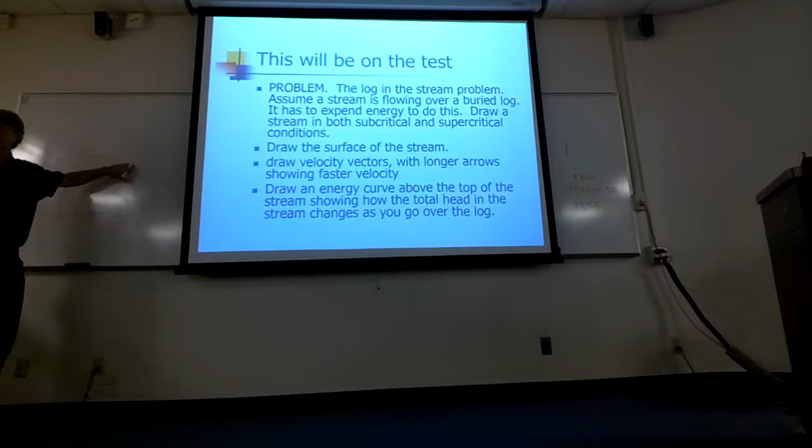I'm in supercritical flow. How do energy and stream respond? I'm in subcritical flow, and my stream goes over a big step. How do stream energy and water depth respond? Just think of simple scenarios and how subcritical flow responds compared to supercritical flow.

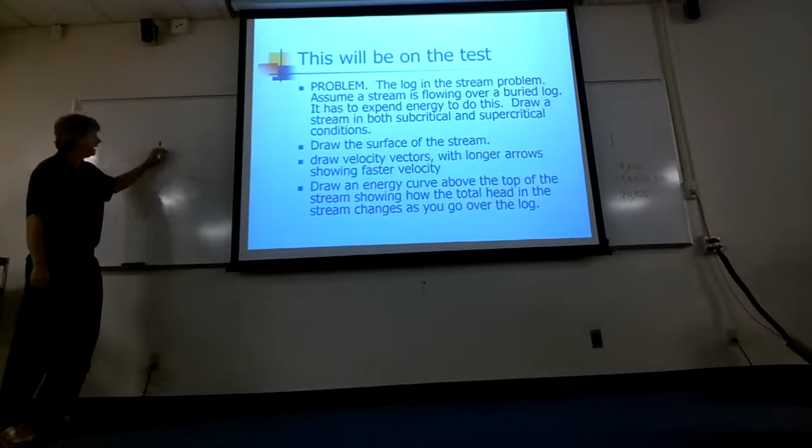So for example, here you'd be gaining energy, because you're going off a cliff. You're trading potential energy for kinetic energy. The stream would actually gain energy, and the height above the bottom of the energy dashed line would get greater coming down here.

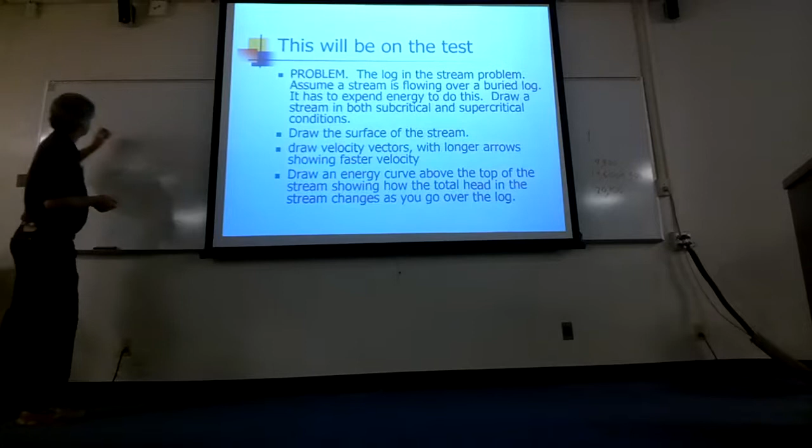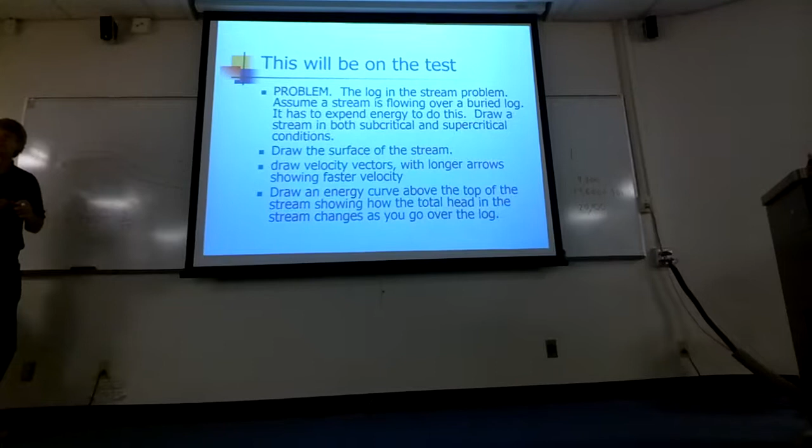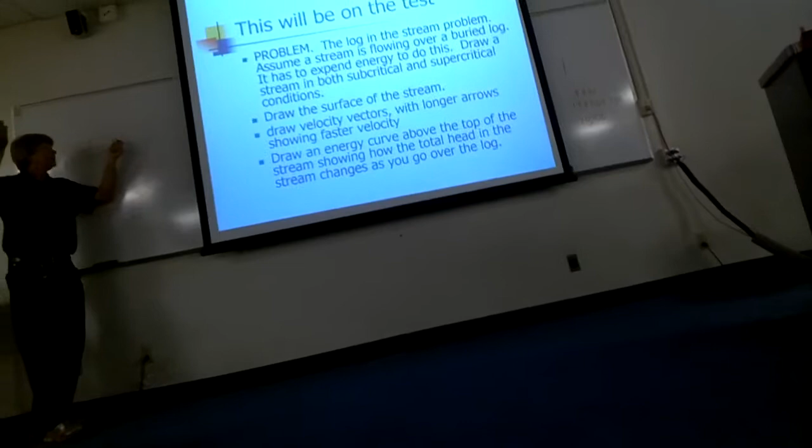It's like so you're going up? No, it wouldn't go up because water flows downhill, but it would get higher above the stream. This distance would get greater. It'll never go up, because you're adding energy by dropping elevation. So it'll never go up, but it can get higher above the bottom of the stream.

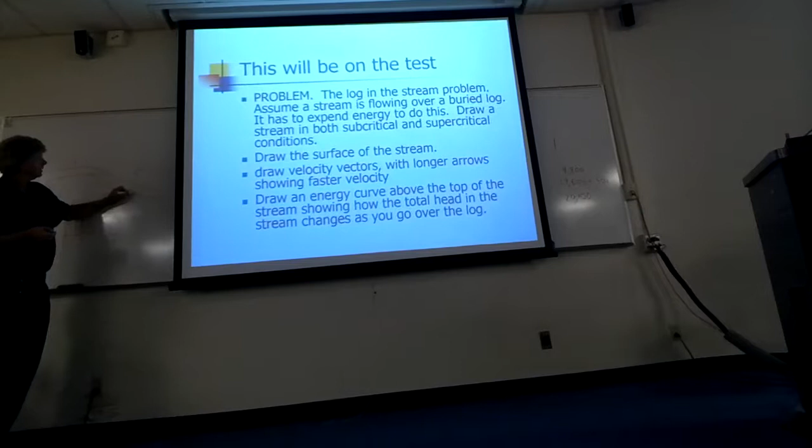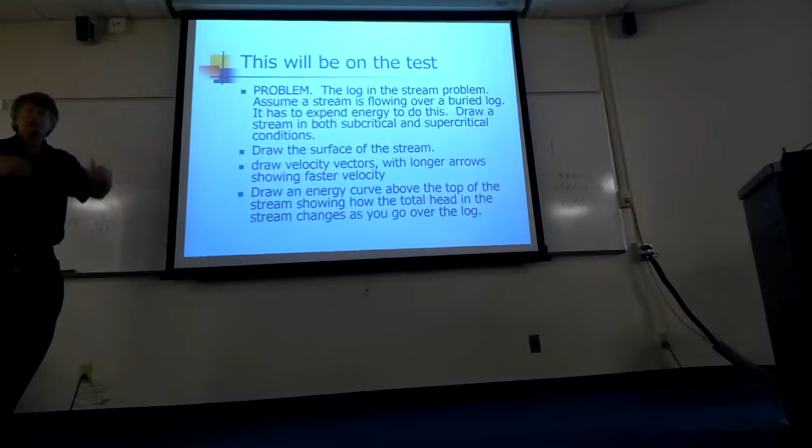That's actually why you get rapids in supercritical flow. You're going down a steep hill, so the water accelerates enough that it becomes supercritical. Why don't you guys play with that and see? Take that little diagram, and now we're adding energy, and see how supercritical and subcritical would respond, just for fun.

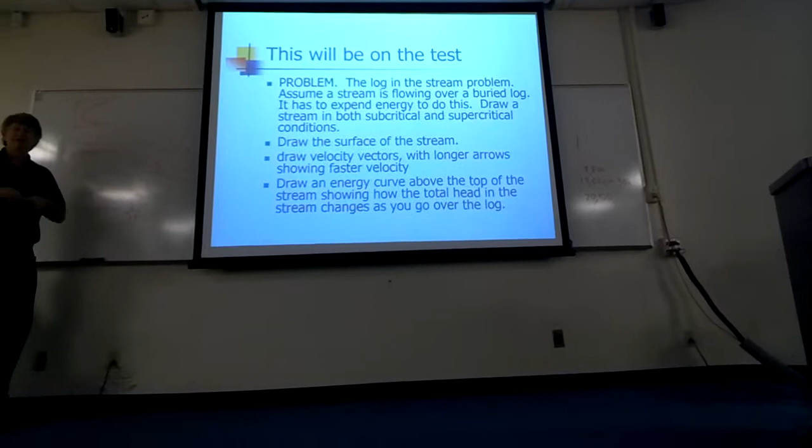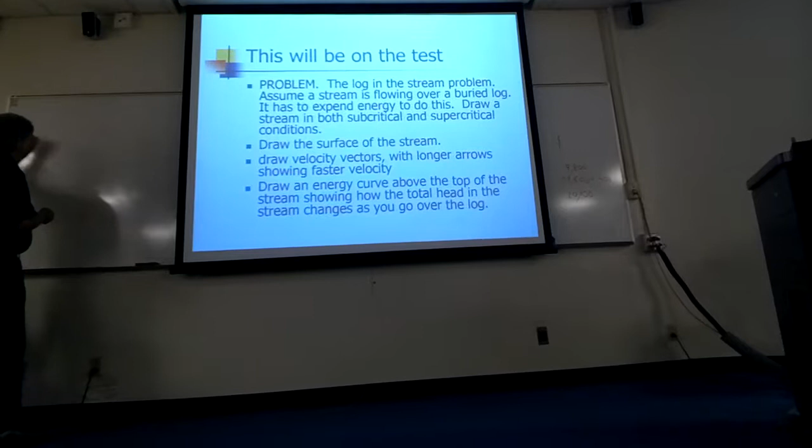We basically went through this exercise just now. Draw the surface of the stream, and usually I'll give you some point. I'll say at this end of the diagram it's here, and at this end I'll give you a rough drawing. So here's the water level on this side, and there are 2 toxic waste barrels in between, something simple like that.

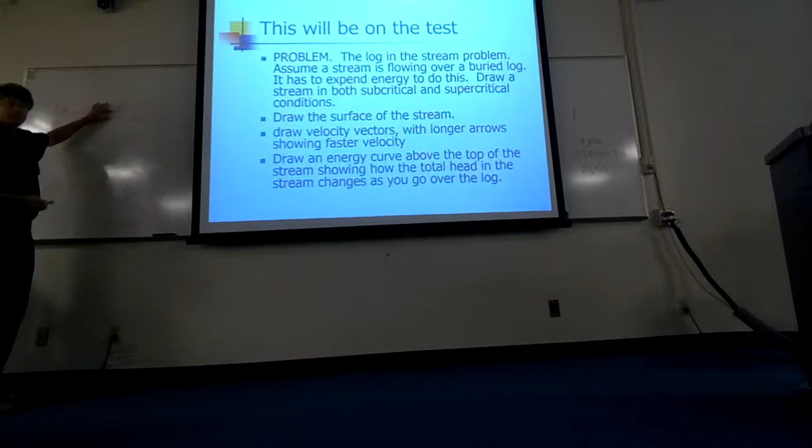You trace the water depth, then you trace the energy as a dashed line, with that being the extra energy due to velocity. The higher the velocity, the bigger the distance between the water surface and the top. The only other thing to add is to show the velocity of the water with arrows. Everybody got it?

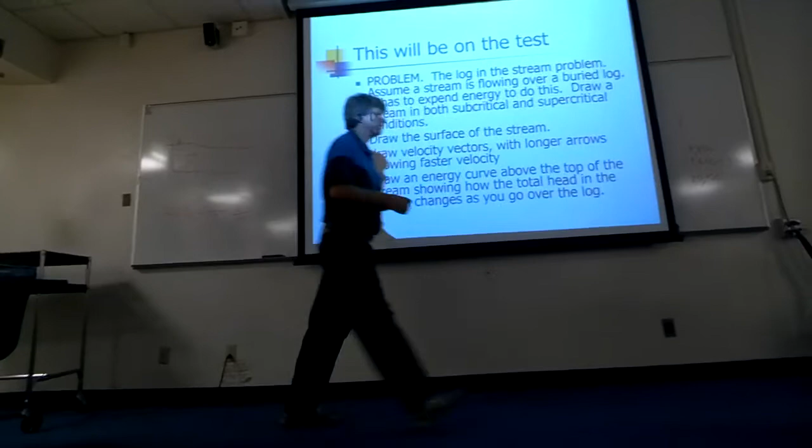This will show that you really understand this. How are we doing? We're doing good.

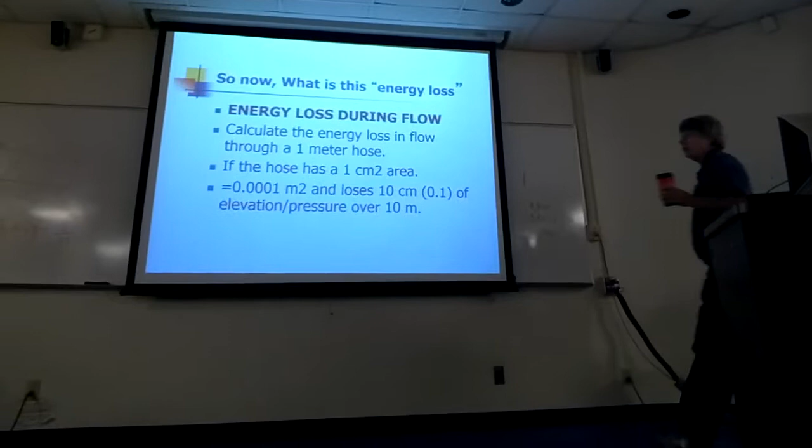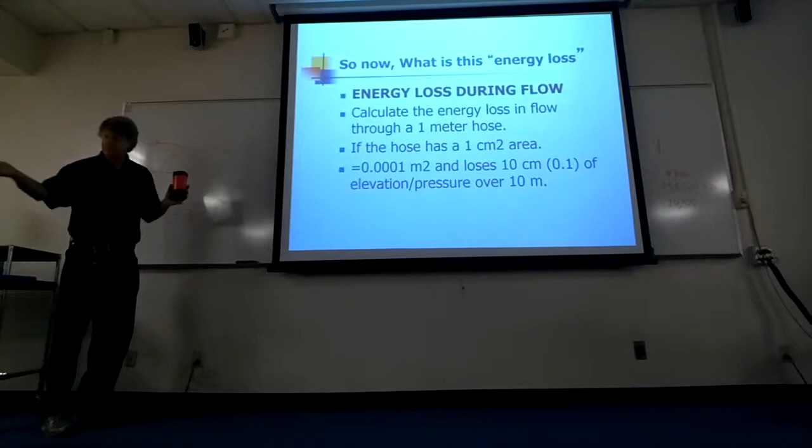One of the things we've noticed is that as you go downstream, streams lose energy. Waves lose energy on a beach. I'm going to skip through this because I don't want to spend a lot of time on it, but feel free to do it on your own.

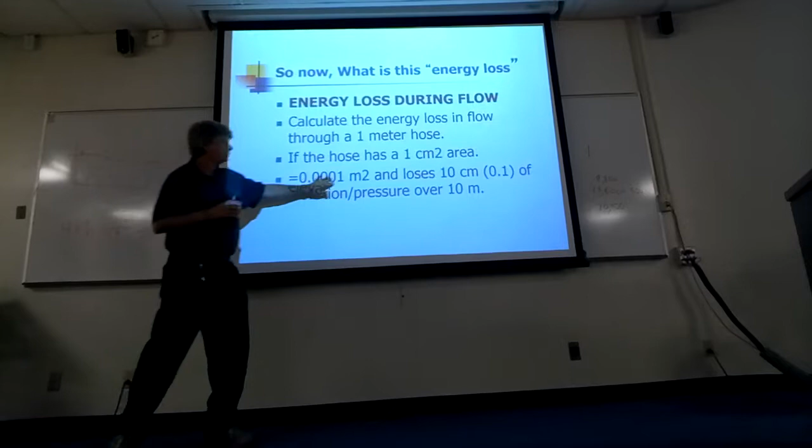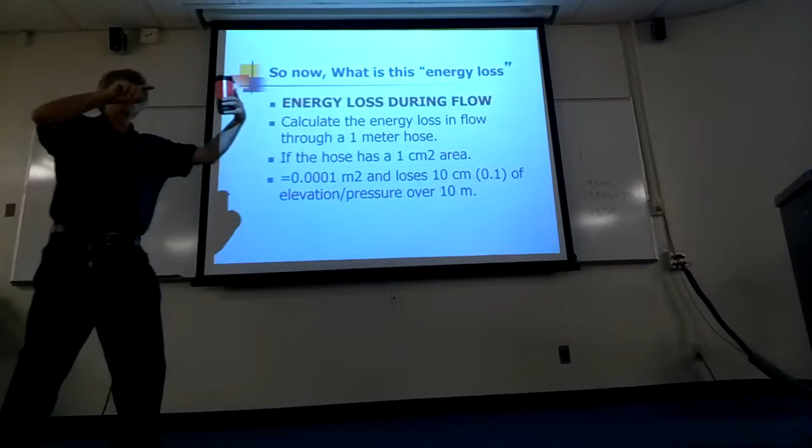The energy, let's just pretend we have a pipe, a hose. In that hose, I've got water coming through. You can calculate the amount of energy in that fluid. It's flowing at a certain velocity through the hose, and it's got a certain amount of pressure.

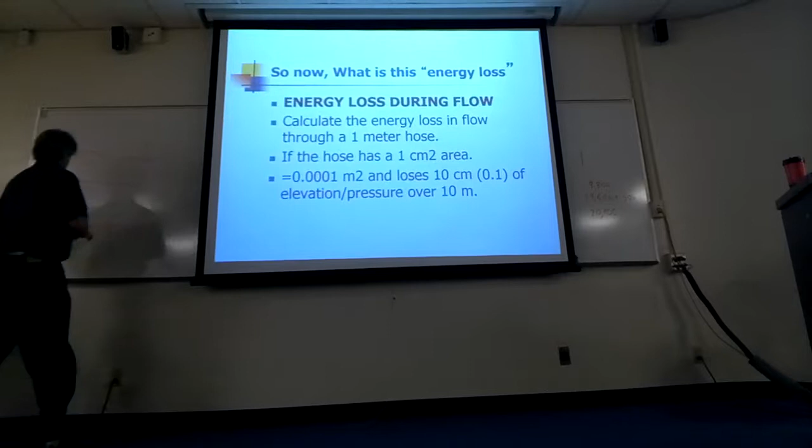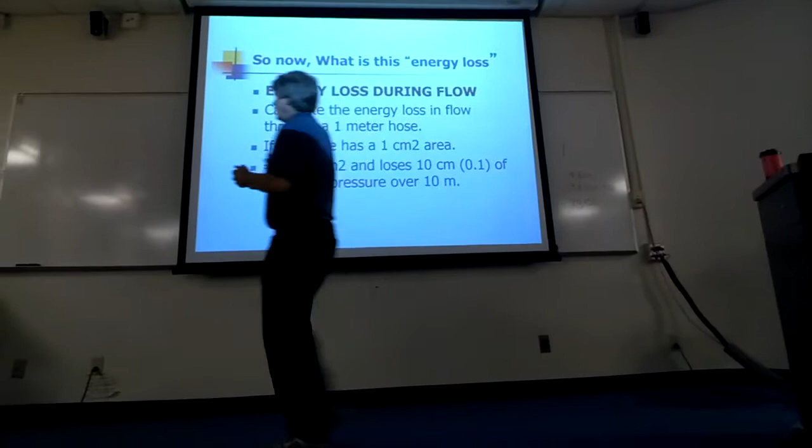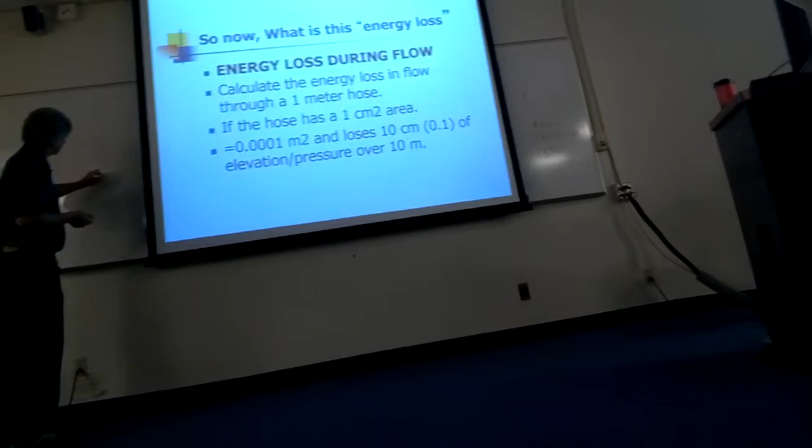The experiment I used to do, but I don't do in class anymore because I kept making huge messes, was that the hose would have enough pressure—we'd have a little clear glass tube coming up, and then go another meter and have another clear glass tube. And you could see that the water level in this hose was less than that hose.

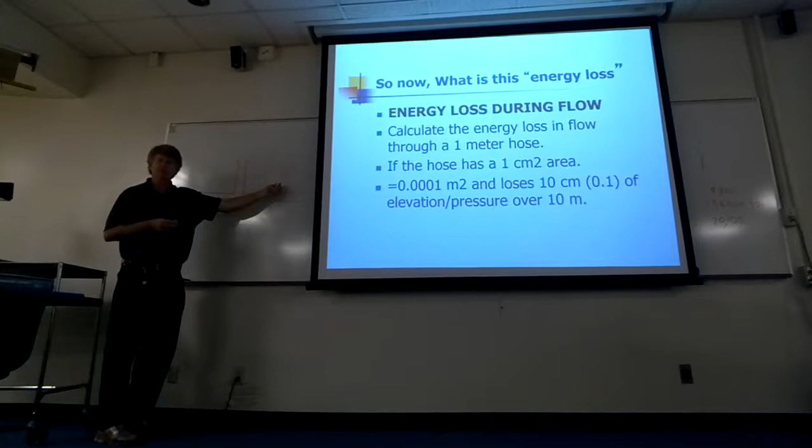So it's the pressure in your hose or pipe pushing the water up here, and you can see it's losing energy as it flows down the pipe. Everybody okay with that?

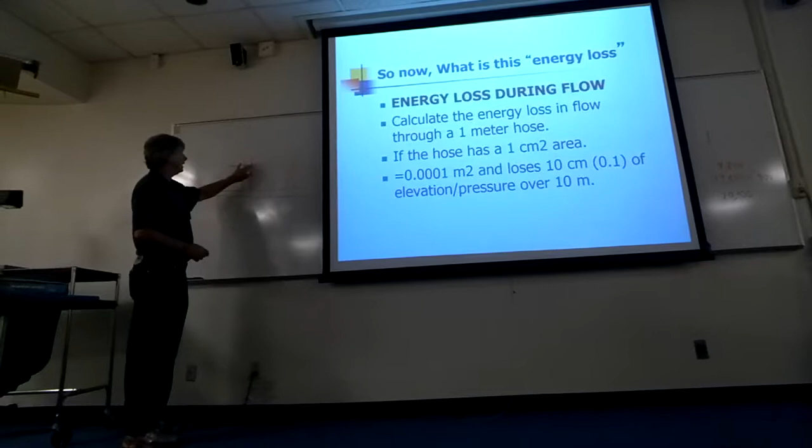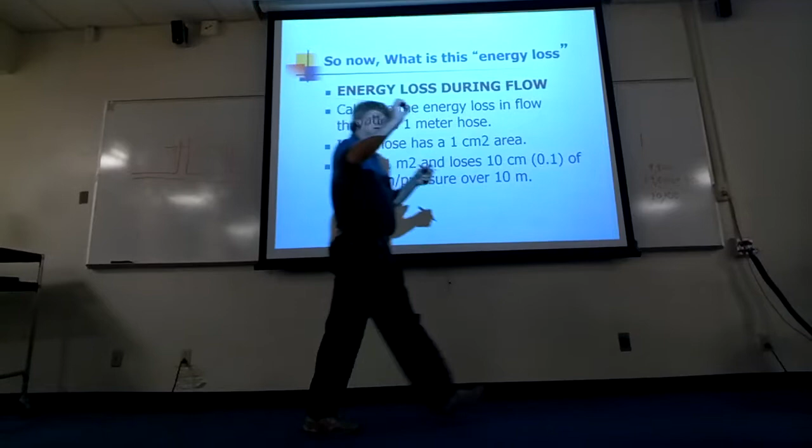We can actually measure the energy in that pipe just by doing this. It's got enough pressure to push it up that high. It's going this velocity, and it has this much area, so that's how much actual energy is in the water.

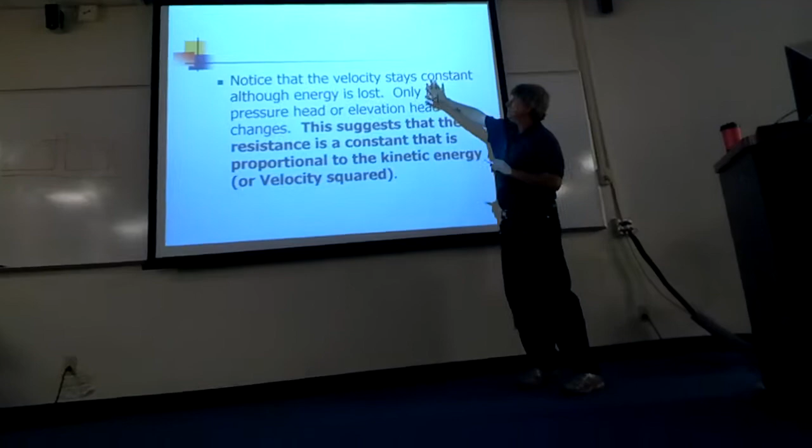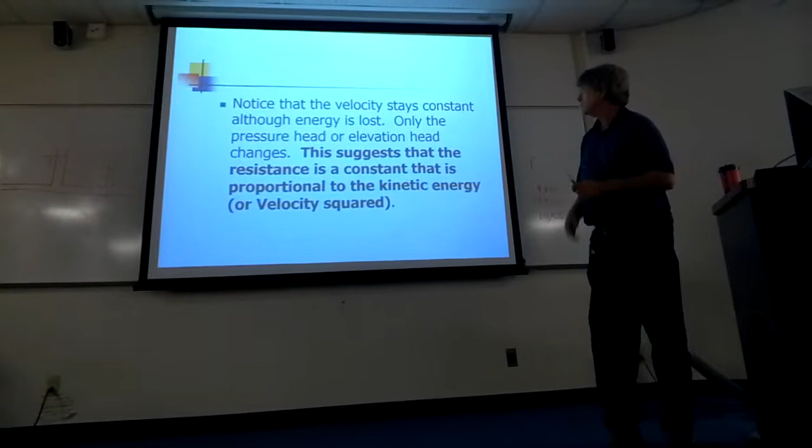We can do the same thing, and because this is a pipe coming out of a sink, the amount of water going down the pipe—the discharge and the velocity—are the same; they don't change. The thing that changes as the water goes down the stream is the energy in the water.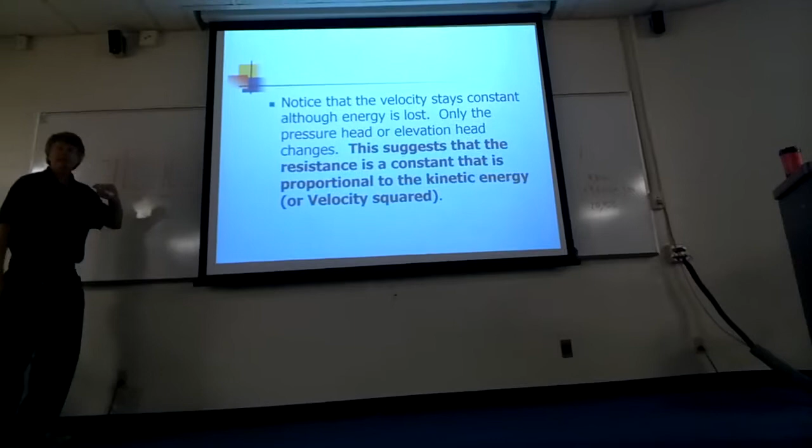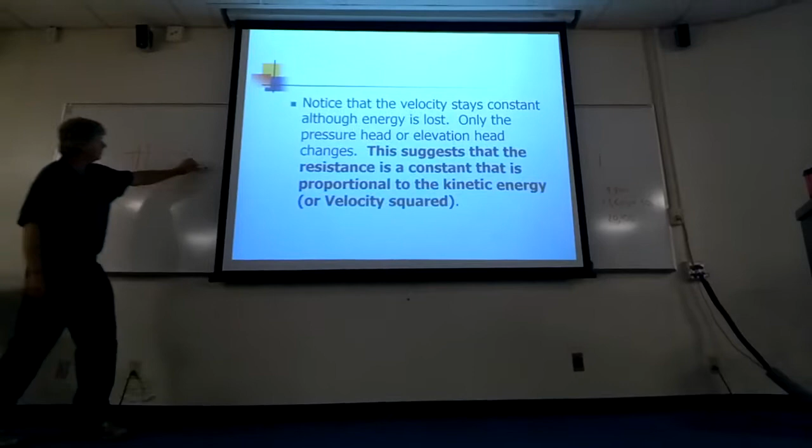This water is flowing at the same velocity as that water, right? And if I made another one, it would be the same distance down. So as long as the pipe stayed the same, the loss in energy, the resistance to flow, would be a constant related somehow to the velocity. The higher the velocity, the faster you lose energy.

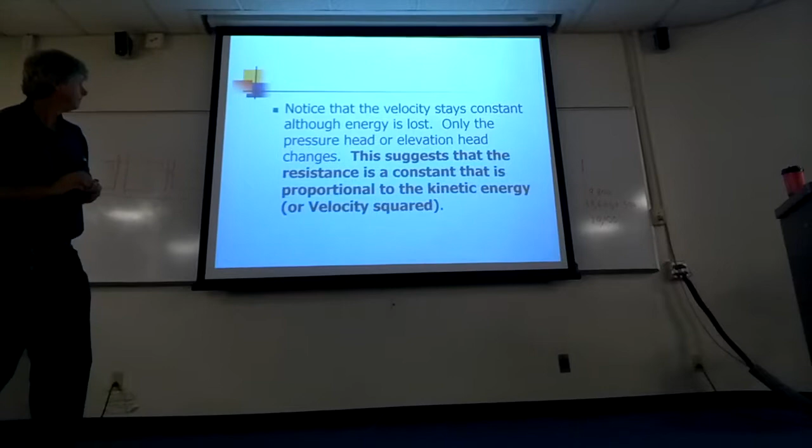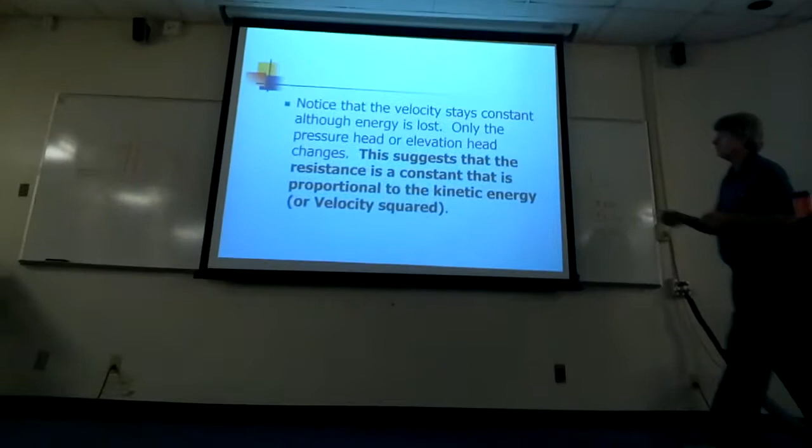In fact, it's related to the kinetic energy of the flow, the square of the velocity. So if I double the velocity, I quadruple the resistance to flow. It takes 4 times—I lose energy 4 times faster if I double the velocity.

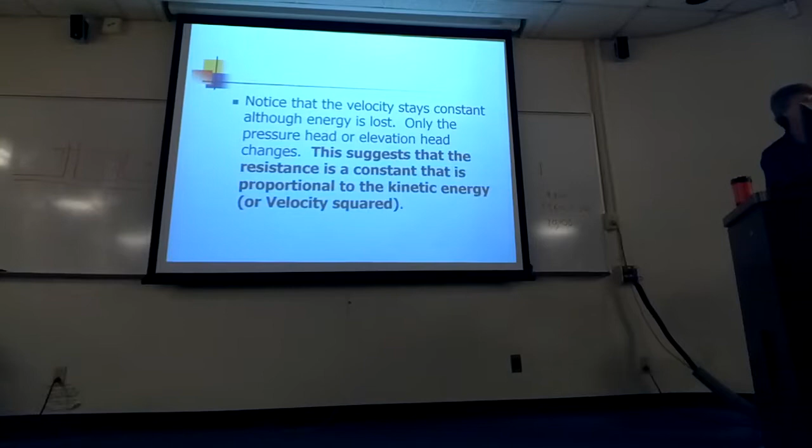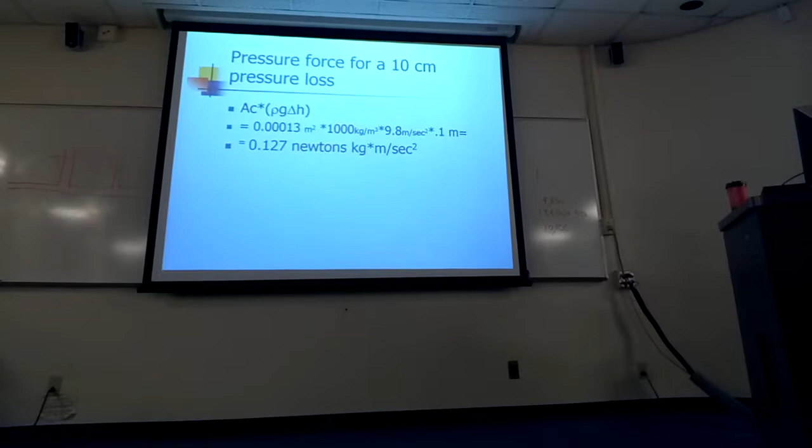In that experiment, if you doubled the velocity, you would notice the pressure difference would get 4 times bigger. If you lowered it, pressure differences would reduce by the square of that.

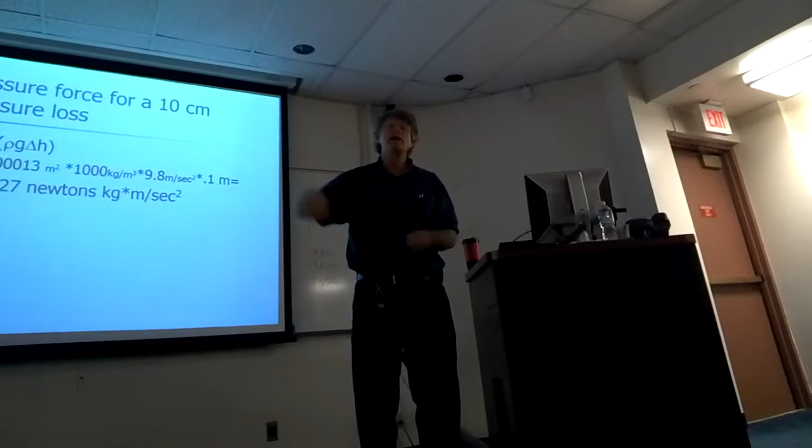It's like misters on your porch. You barely turn on the hose, and the last mister's not going to have as much oomph, as much pressure, coming out. Once I tried to use hydraulic power to drill a well, and I had to run like 200 yards of garden hose. By the time I got to the end, it was barely dribbling out, because the pressure at the top wasn't enough to push it all the way down.

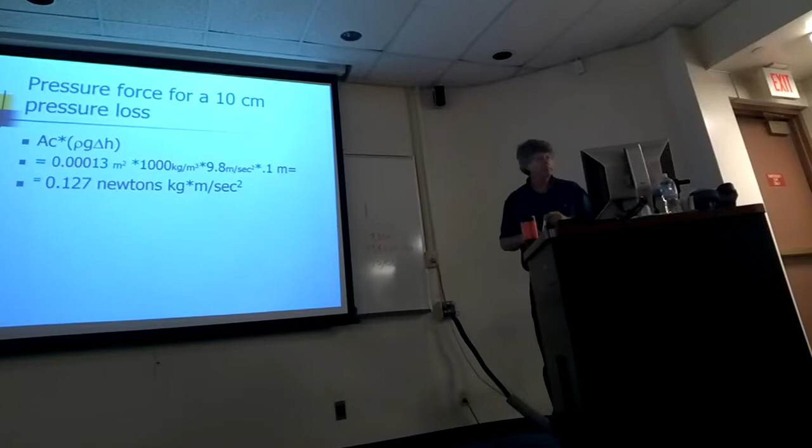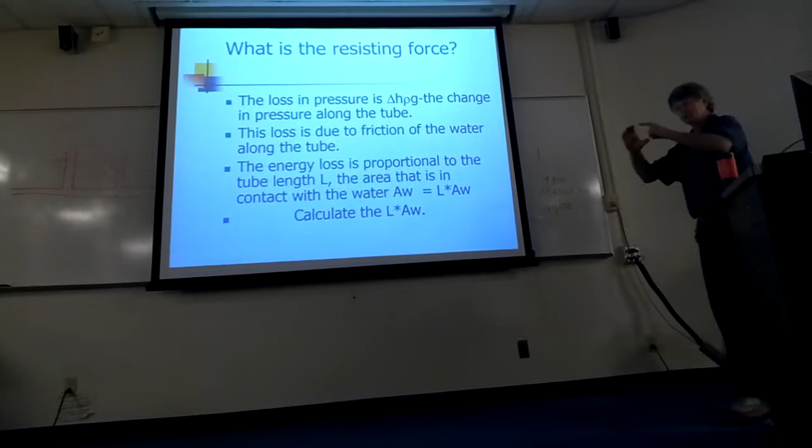So this just says that the cross-sectional area times the density times gravity times the change in pressure is equal to the energy in the hose, the pressure force in the hose. The pressure in a hose is related to the area of the hose. A bigger pipe has a lot more energy than a little tiny pipe.

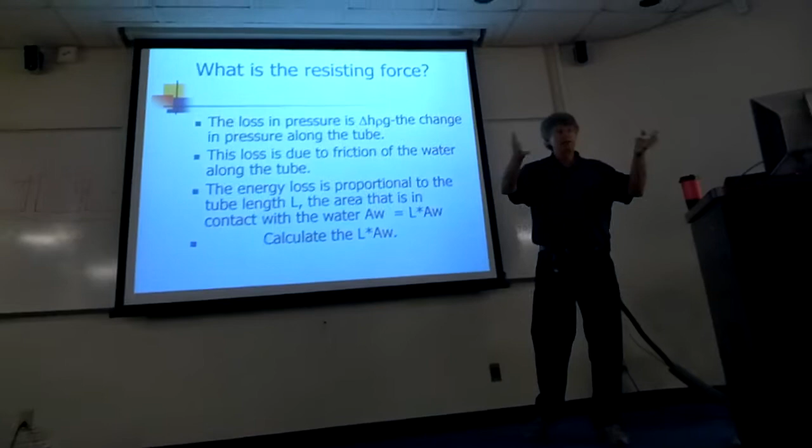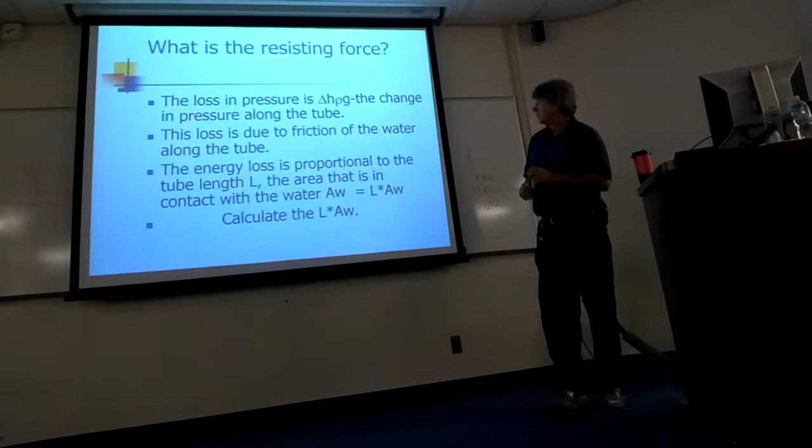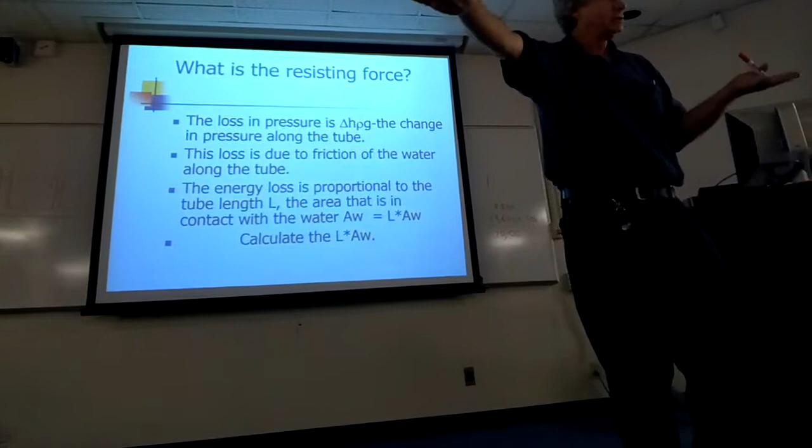The size of your river gives you the energy. The pressure loss is due to drag on the sides of the hose, or on the bed and banks of a stream. Basically, the energy lost is proportional to the wetted area and the distance you go. The farther you go, the more energy you lose. The more area you've got to drag along, the more energy you lose.

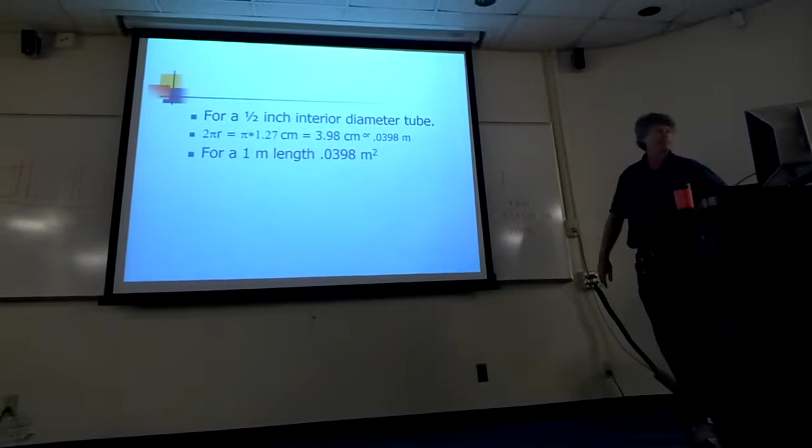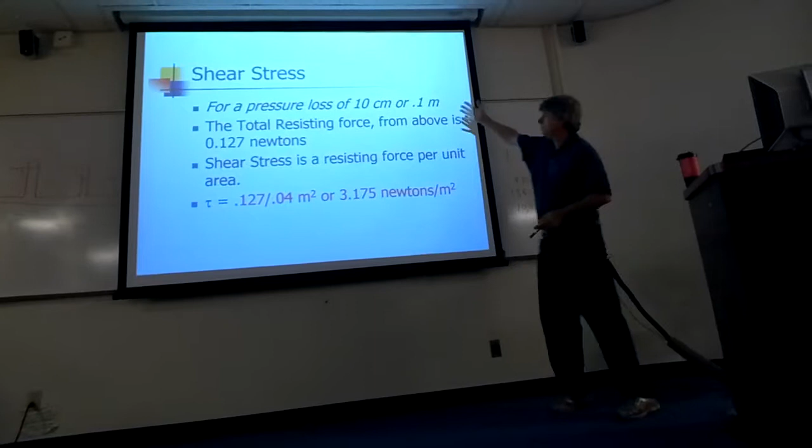I'm going to skip this again too. You could do these calculations on your own if you feel like it. Here's where I do it for some of those calculations, so I'll let you guys play with them.

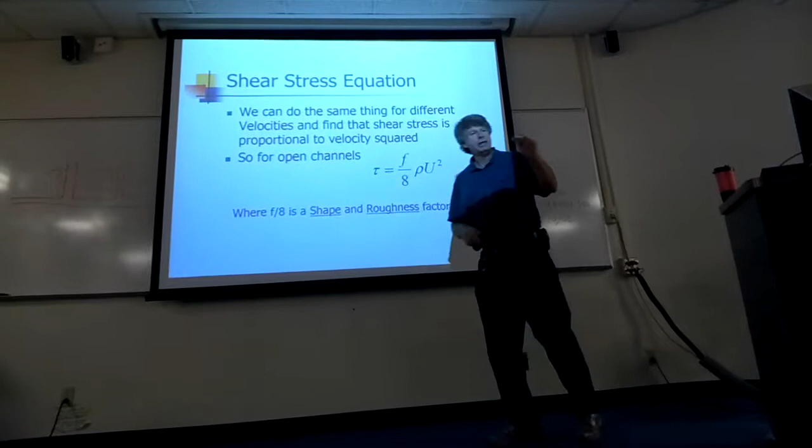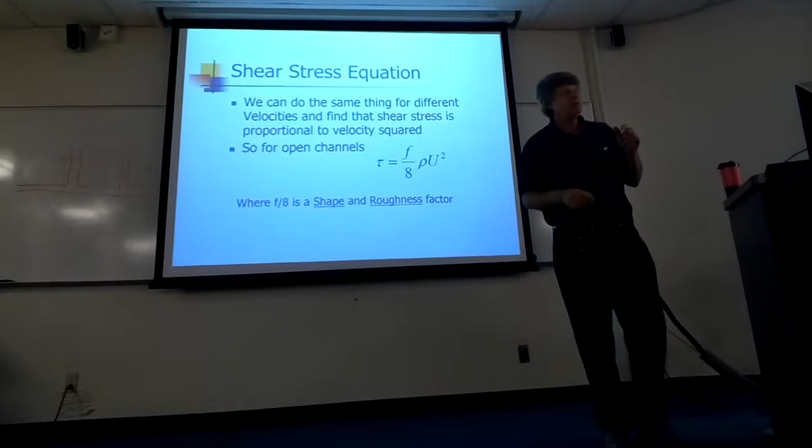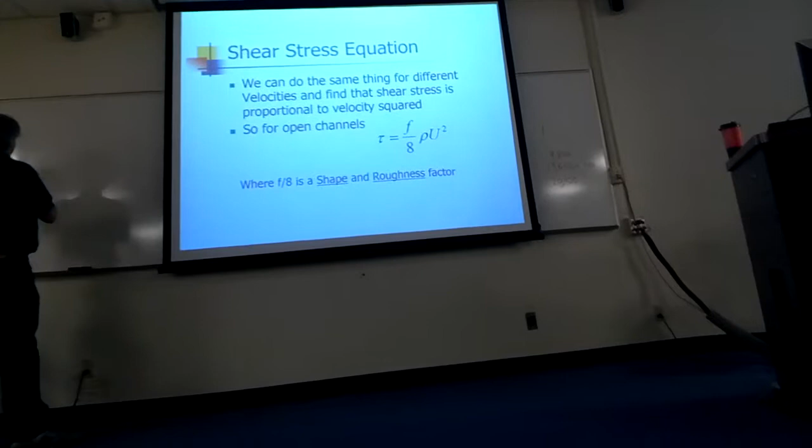You can calculate shear stress with different equations or different settings, and people do that. What you have to do is measure that loss in energy and relate it to velocity, to the density of the stream, and if we do it for an open channel flow, which is basically a canal or a river, the elevation loss, the energy loss in the stream, is proportional to the velocity squared.

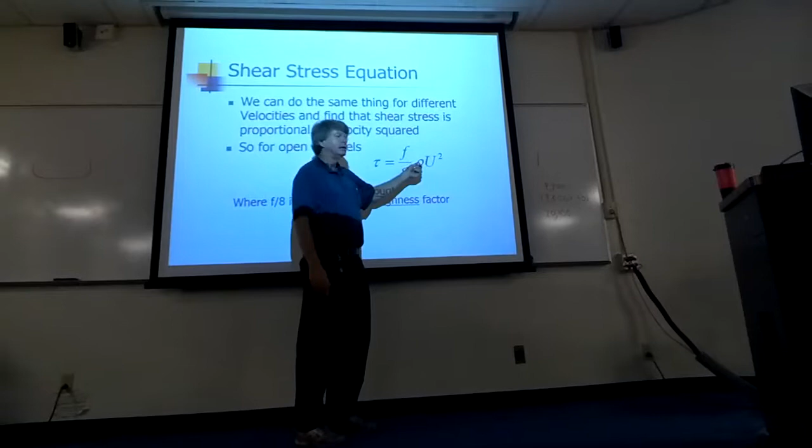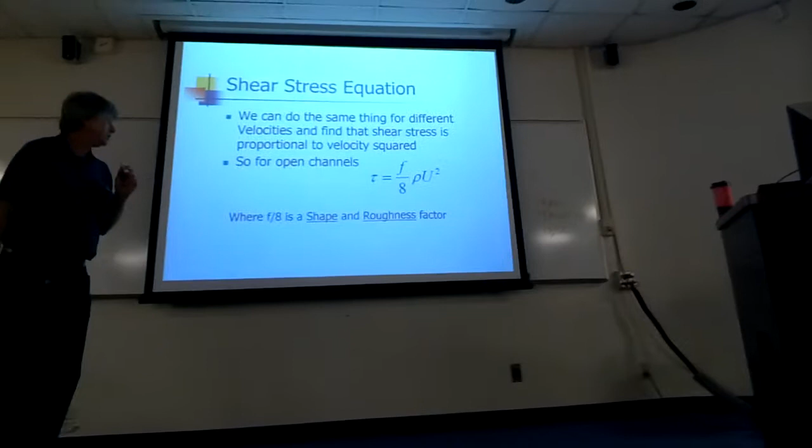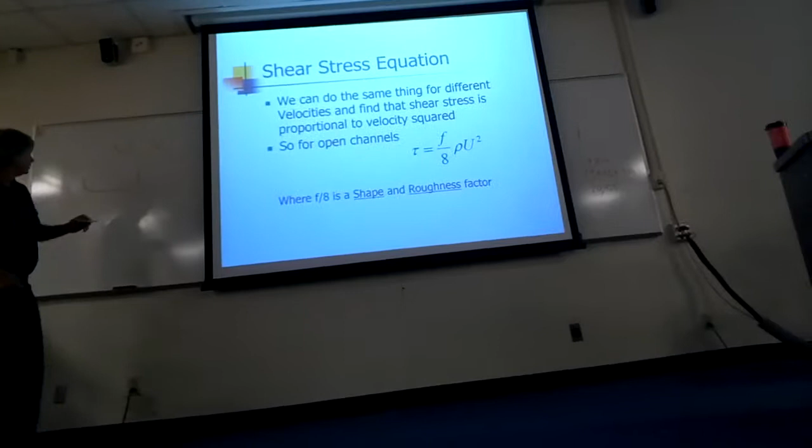We already figured out that would be the case: the faster it's flowing, the faster it loses energy. It's proportional to the density of the fluid, and then there's a shape and roughness factor. If you have a U-shaped channel or a V-shaped channel, most natural streams you can approximate with half a rectangle, two banks and a bottom. If you actually try to fit a rectangle to most natural streams, that's what they come up like.

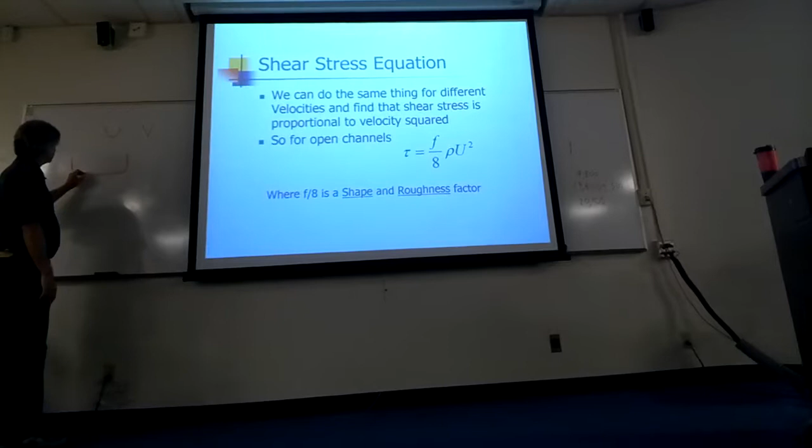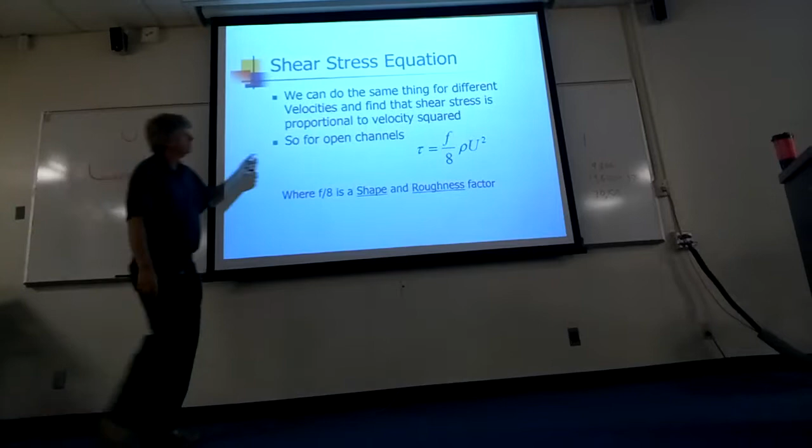So the F over 8 accounts for that shape, and then it accounts for what's on the bottom - is it a nice smooth bottom, or is it full of toxic waste particles? The rougher it is, the bigger this number is, the more the energy loss for any given velocity.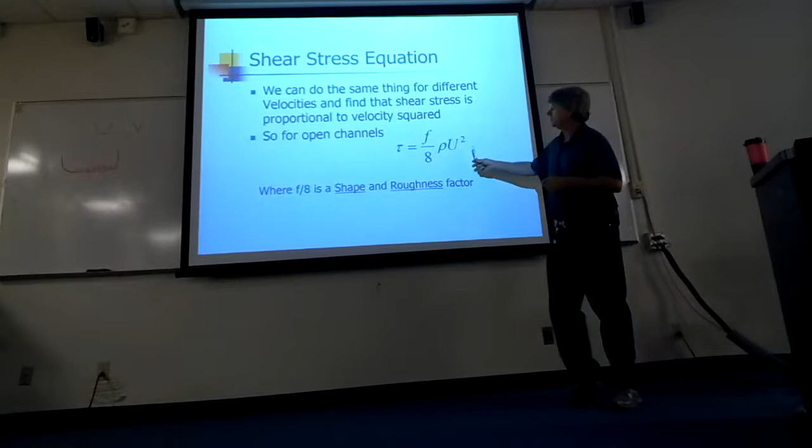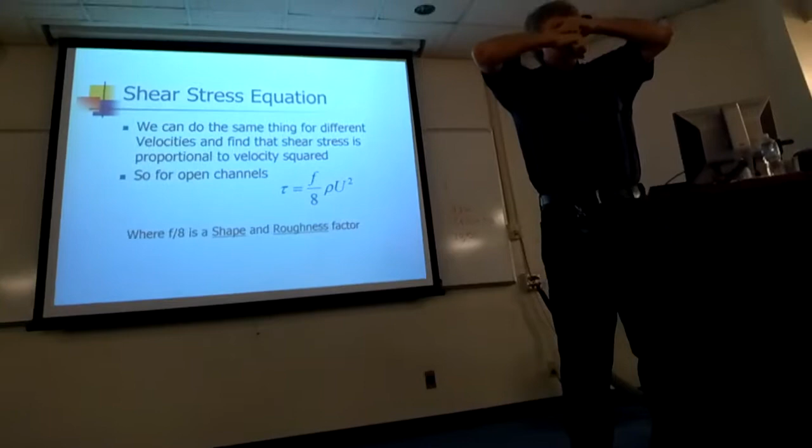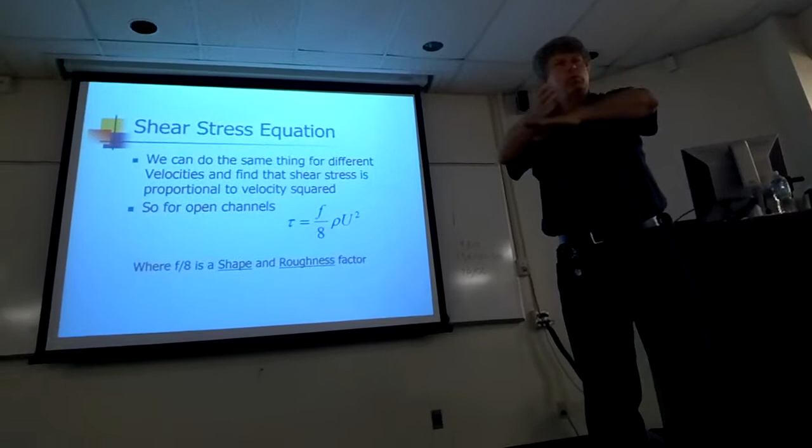This tau, Dr. Pavlis has probably given it to you - it's called shear stress. His shear stresses were in megapascals, where rocks are dragging across other rocks. Here we just have water dragging on the bottom of a stream, and that does two things.

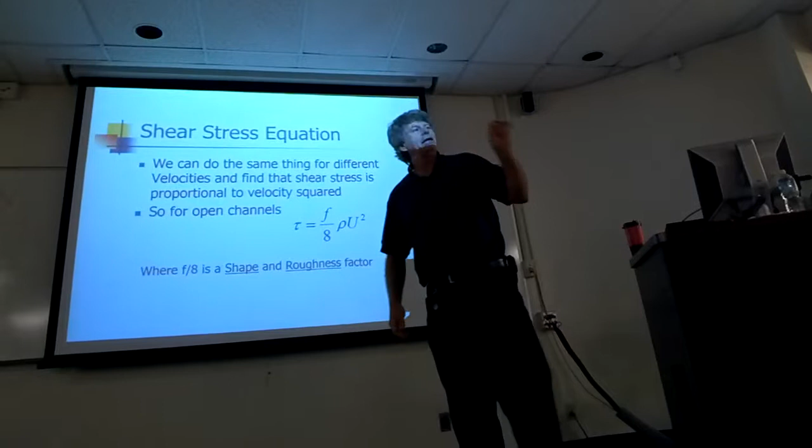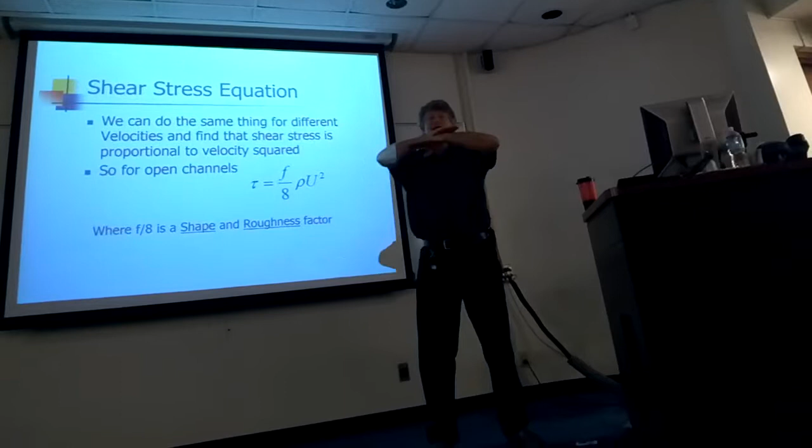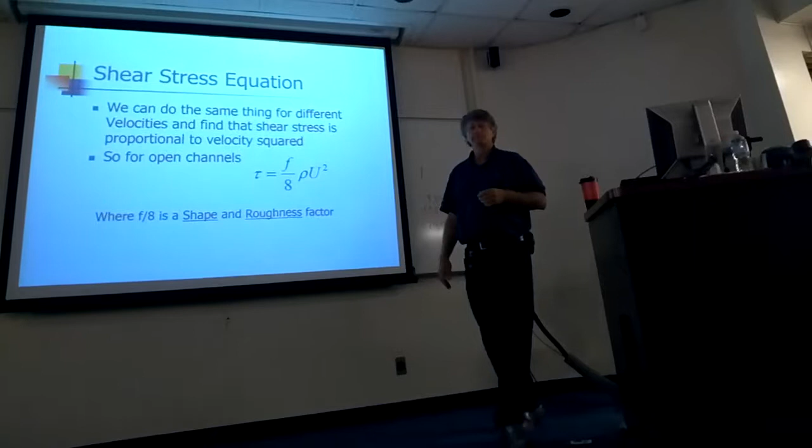As the water's going along, the stream is dragging on it, and that slows it down and causes it to lose energy. So the surface of the water gets lower, and the stream doesn't keep accelerating till it's going infinitely fast. Same thing happens on the bottom - the bottom of the stream has the water dragging over the top, pulling at the bottom of the stream, partly with the Bernoulli factor, and that is what causes sediment to erode and be transported down the stream. So this is what causes sediment to be moved in nature.

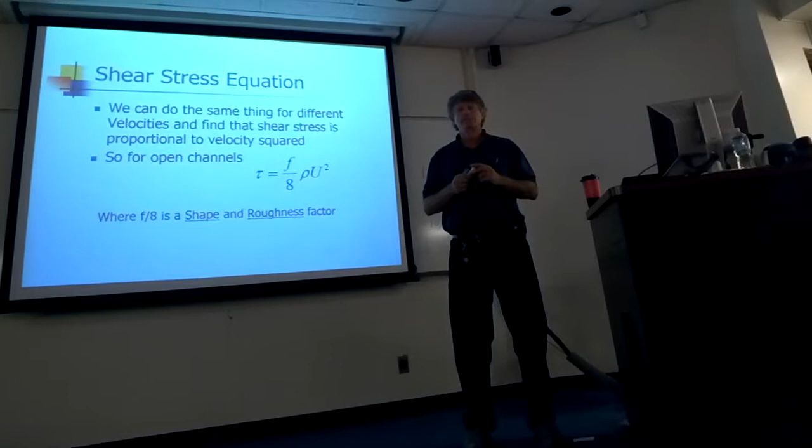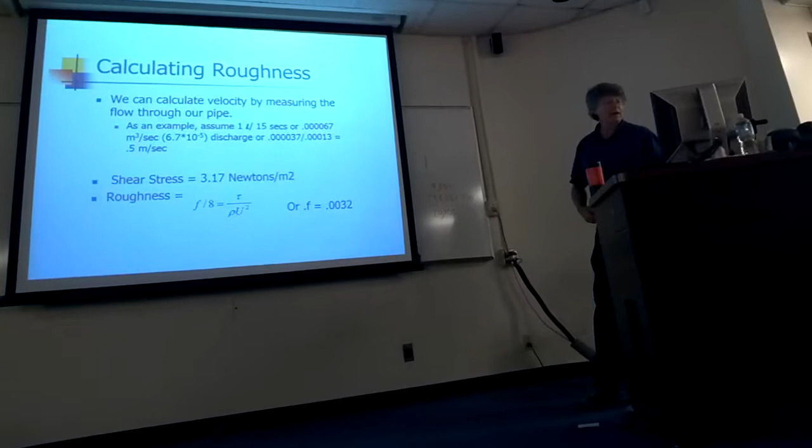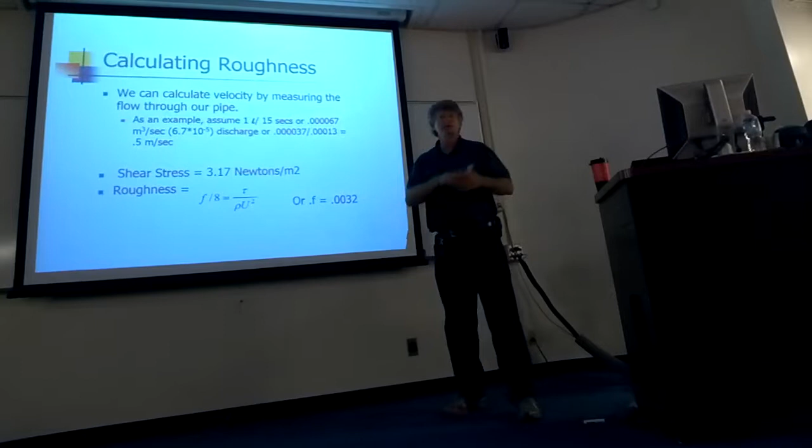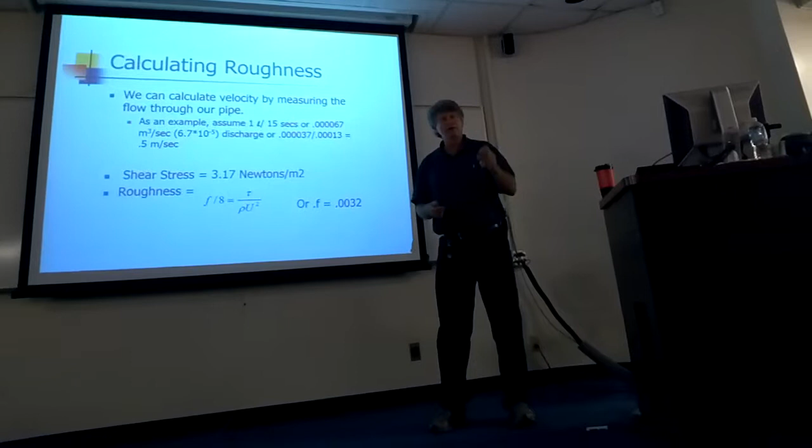So we can calculate the roughness on our pipe, and basically this is how they figured out these F values. They actually went to natural streams in different places and said, okay, here's our velocity, here's our depth, here's our water density - how much energy does it lose? They can estimate, or pretty well calculate, the amount of energy used, usually by looking at the change in elevation of the water, how much it lost in elevation, and then the change in cross-sectional area and depth.

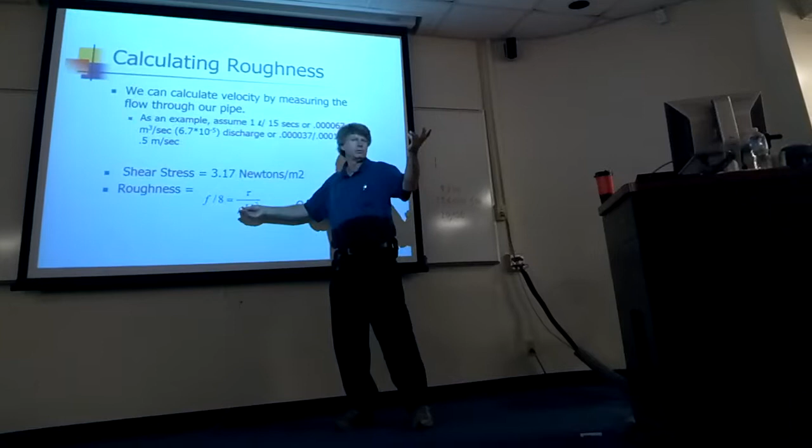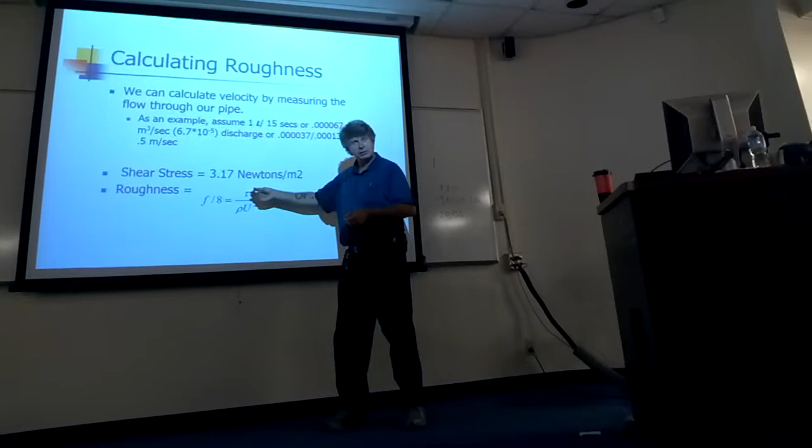So you can actually measure all those things - you measure the velocity, you measure the density by using a temperature, or you can actually weigh your water if you want to. You know how much energy is lost, so you know what the shear stress is, and then you can use that to calculate the roughness factor.

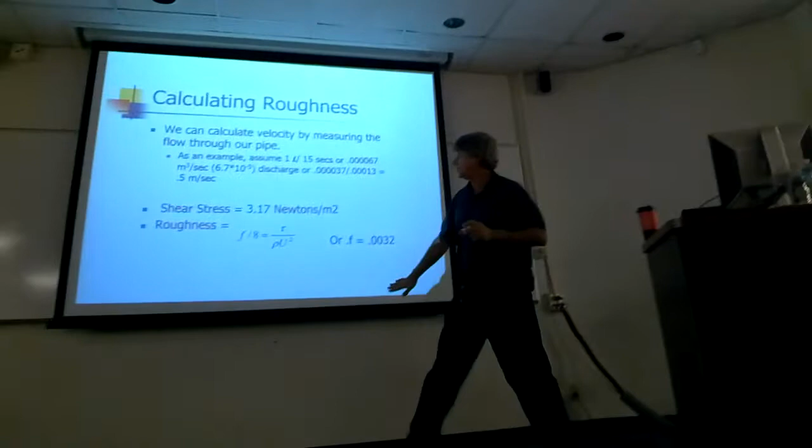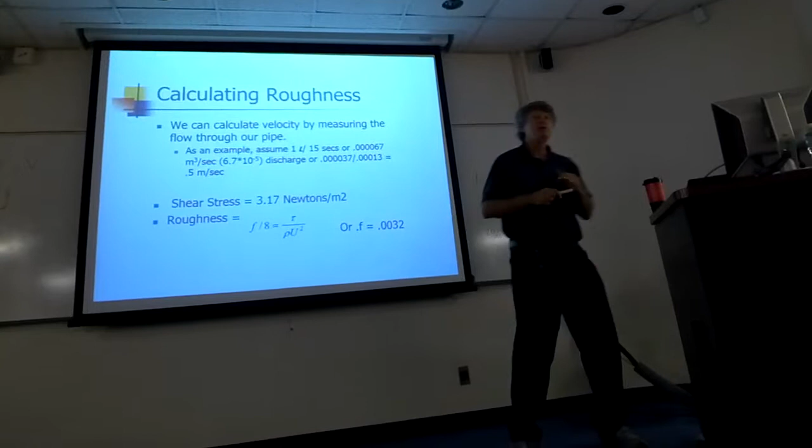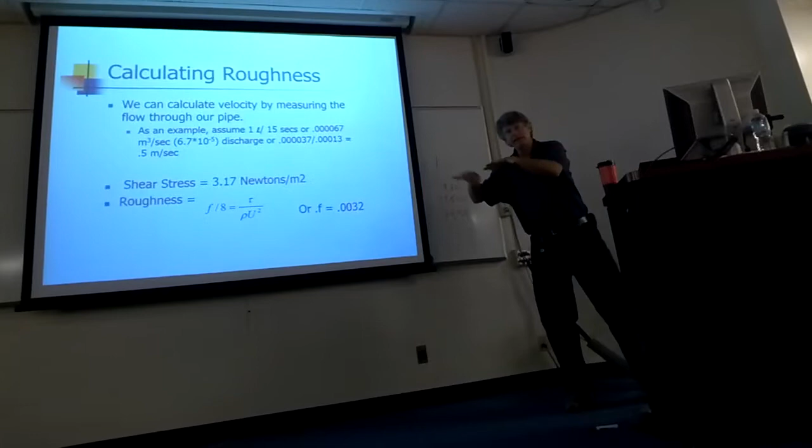People have come through and empirically come up, for natural channels, with all these different roughness factors. This roughness factor is called the Darcy-Weisbach friction factor, and there are 3 or 4 different kinds of friction factors that engineers use. You won't have to calculate any of these because they do them by making lots and lots of measurements, and I will give you reasonable estimates for them.